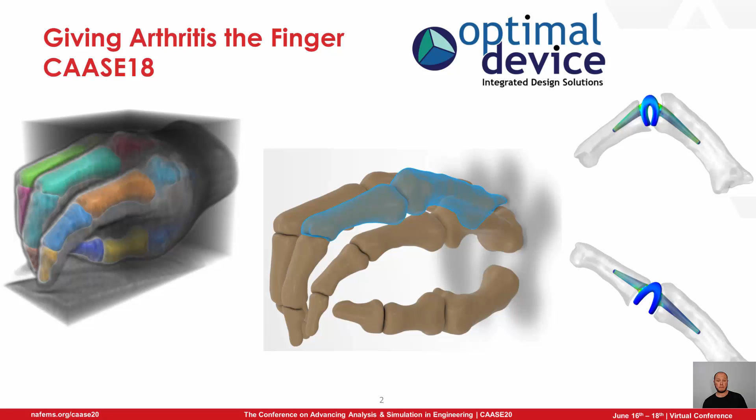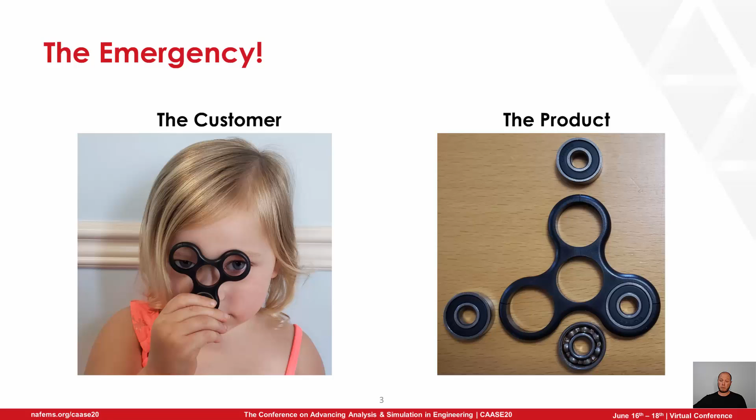But for today, we've got an emergency. The customer, Caitlin Stoppelman, who's 3.5, has a broken fidget spinner. She is not happy. It has multiple cracks, and 3 of the 4 bearings fall out easily now. The product is on the right, and we need to figure out what went wrong.

I'm dubbing this talk Excessive Engineering because I'm basically taking a trivial product and applying every single technology that I can think of at it. So we go with CAD for CATIA for reverse engineering, injection molding with SIMPOE, FEA with Abaqus, all on the 3D Experience platform. Then we go to topology optimization with Tosca, finish up with SolidWorks, and then 3D print it with FlashPrint. So let's get moving. We've got a lot of slides to go through.

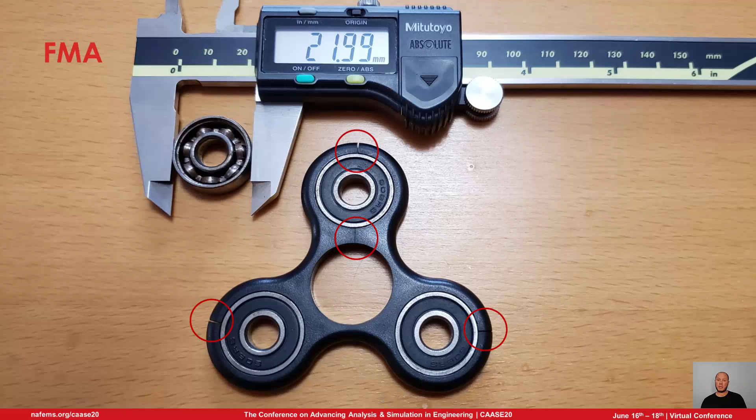So first thing we gotta do is to break out my trusty calipers and do some measurements and also identify where the part failed. I circled the 4 failures in red here, and one thing that's noteworthy is the way I have it oriented, there's a remarkable amount of symmetry to it. Right at the bottom center is where the injection molding was applied.

So we take some rudimentary measurements, do some quick CADing up, make sure there's good design intent. So at first, when I modify this dimension, the 4 that's highlighted in blue, the sketch kind of blew up. So just make sure that you're imagining how you're going to be designing it, what things you might change, and have it so there's design intent to your sketches.

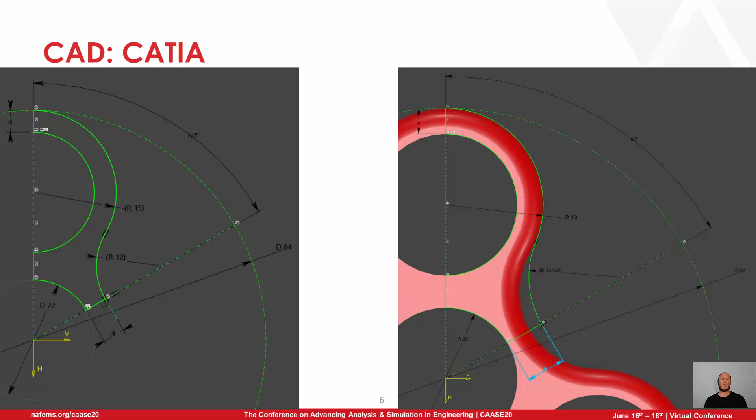So after we had that sketch, we do a pad, or what SolidWorks would call an extrude. Then we do edge fillets, do a mirror, and a circular pattern. So quick and easy, all done with geometry.

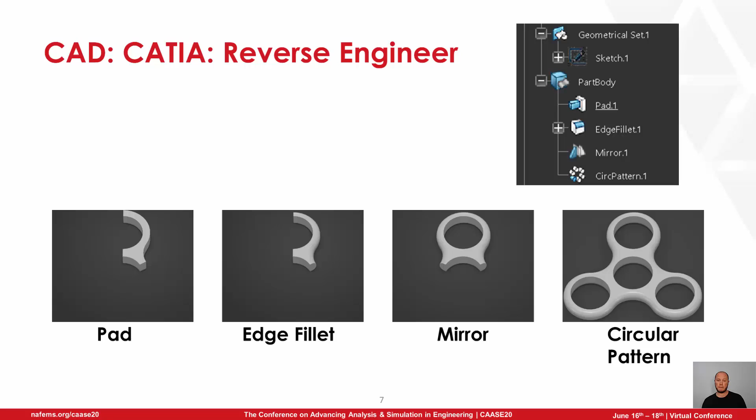Now we take this geometry and we are going to do an injection molding simulation. That bottom cone is where the injection port was. I'm estimating it's a 3mm, and I'm also meshing with a 1mm mesh size. Aside from that, it's basically defaults using ABS plastic as the material, and we're just going to do a fill simulation. So we're not going to do a pack and fill, just a fill.

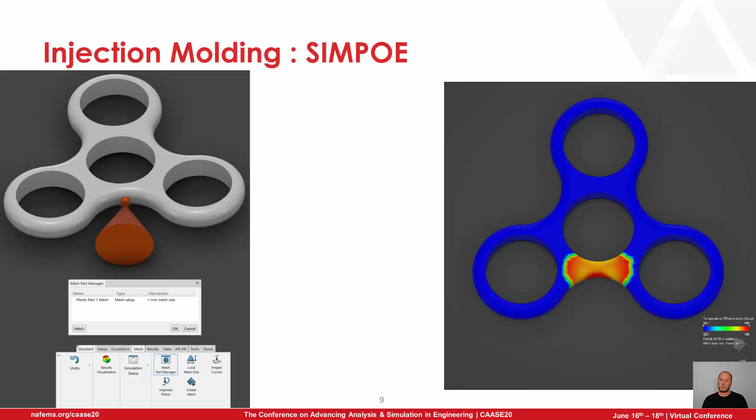So on the right, we've got the animation. The blue is where there's no material. The colors are showing the temperature of the material as it's flowing through, and it actually flows around and touches itself. Where those points occur, where one flow hits the other flow, is of primary interest here because the front of that plastic is a little bit cooler, and they're actually joined together, but it's a weak connection. So it's less strong there. It's a likely failure location.

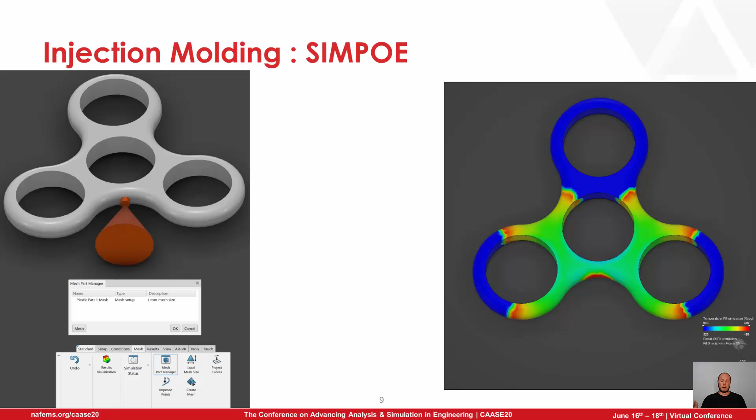So we have a root cause. We know why it's failing, where it is. I expect it's actually due to material shrinkage because this actually came out of a drawer after getting dusted off and actually had the crack. So I think the material is actually still shrinking with time, possibly due to humidity.

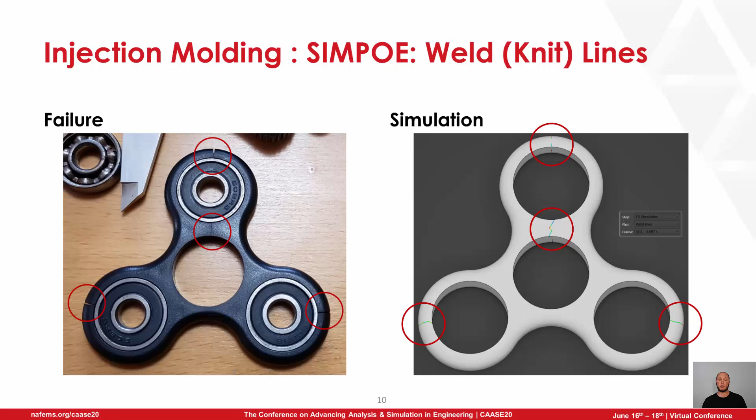So now, what can we do about it? Lots of times as engineers, we're told, I need you to fix it, but don't change anything, which is lovely when you get that. So if I can't change the geometry, I can change where the injection ports are.

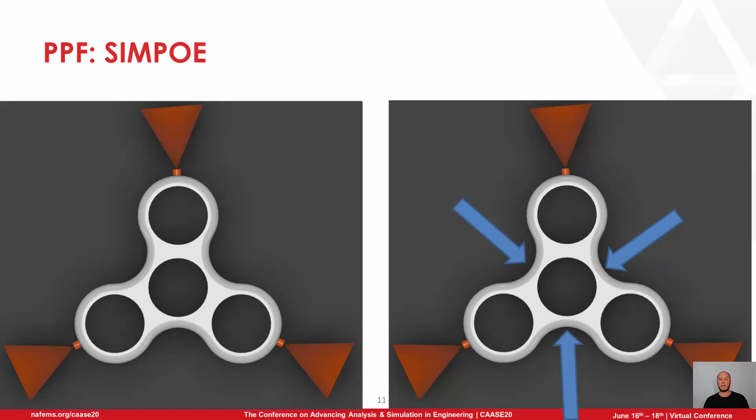So I've got 2 proposals. One on the left is the 3 cones that we're injecting at the outside edges of each lobe. An alternative that I could have gone with is the 3 blue arrows on the right-hand side. I chose the left one because I thought that it would provide a little bit more leeway in the manufacturing or in the design to make it so we can thicken it and stiffen it in these regions so we're less likely to fail because there's more material there.

So then we do the same simulation as before, but now with 3 injection sites. And you can see now it flows around very symmetrically, so we didn't have that asymmetry as we did before, which should aid in the balance and actually make the product work better.

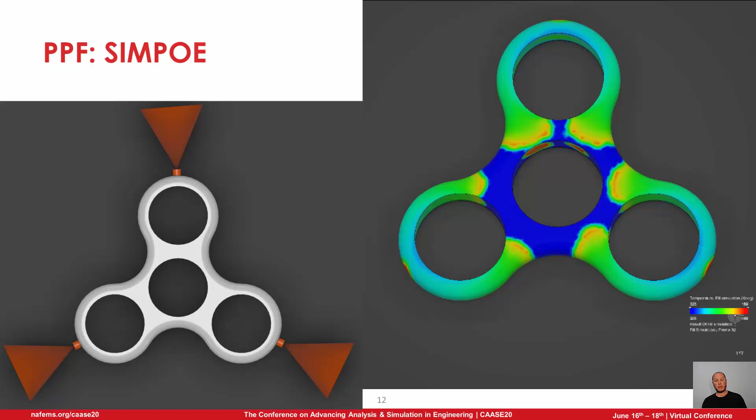But now we went from 4 failure sites to potentially 6 failure sites. So is that good or bad? I think it's okay because, like I said, we can modify the geometry there to make it so it's less likely to fail.

And here's those 6 sites circled for the knit lines.

So after this, I want to do some FEA analysis. I weighed all the bearings because I didn't want to actually model bearings, so I'm just going to have representative cylinders using stainless steel material properties, but the density is modified to make the mass appropriate.

I find that the bearing could basically be determined as rigid compared to the ABS, but with sliding contacts and a lot of non-linearities, having a little bit of give to that otherwise rigid material actually helps a lot. So I tend not to use rigid parts very often.

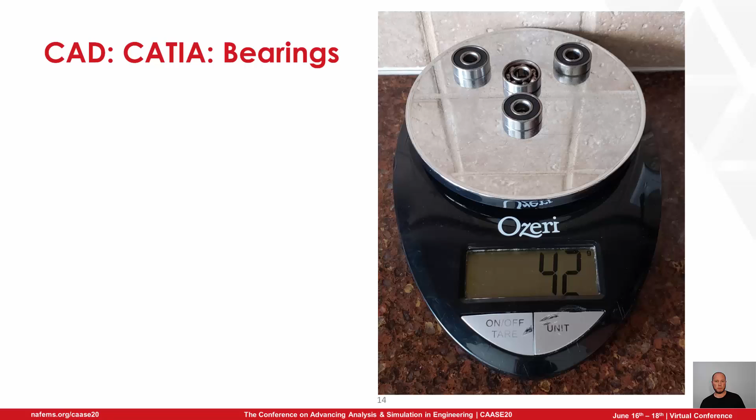The center of the center bearing I'm fixing for the second step, and then the centers of the outside bearings, for the second step, are being translated to basically extract out the center bearing. Because I don't know how much interference actually was in the design, since I got a failed part that's already splayed open and could have already been plastically deformed.

So I went and looked at some other similar products and made a best guess on how much force it takes to extract out that bearing. I'm guessing it's about 30 pounds.

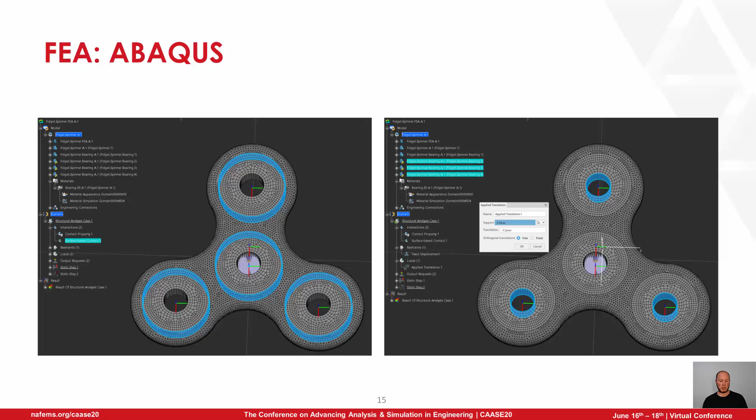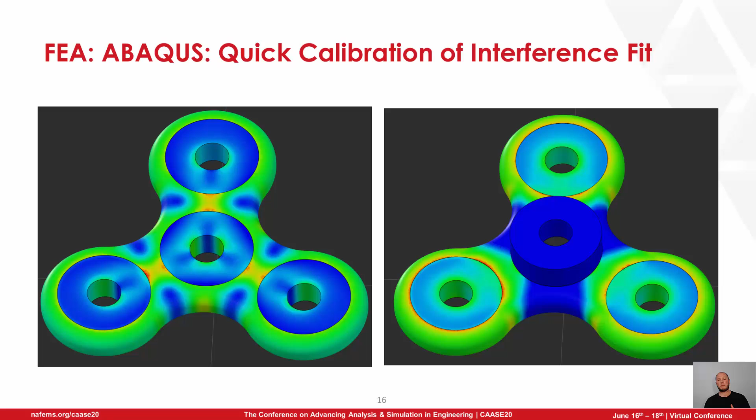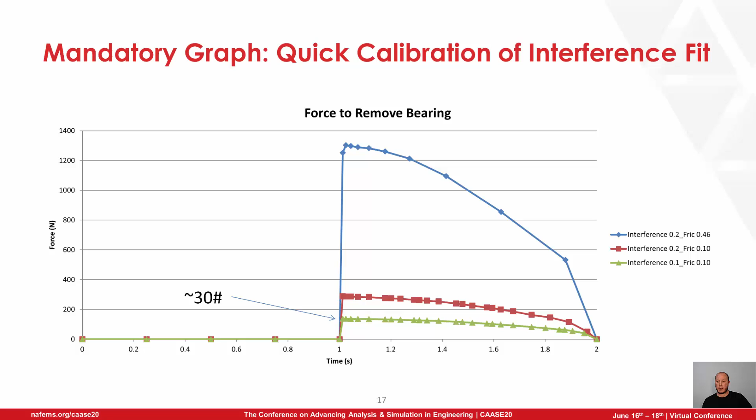So literature varied a lot on what the frictional coefficient was. The highest I found was 0.46. There seemed to be a general consensus that 0.1 might be appropriate for ABS on stainless steel, but there was a wide range, so I did 3 different cases. I ended up getting to a sweet spot after 3 attempts, so 30 pounds it is, with a friction of 0.1 and an interference of 0.1 as well.

So then I wanted to figure out what a real operating load would be. I think if you spin this thing really fast, it basically wants to break apart and fly off—so a rotational load.

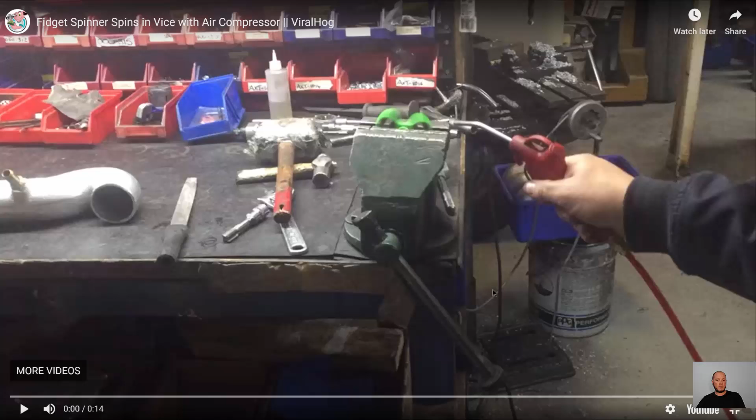So I found this video of some crazy people. Do not try this at home. They don't have safety glasses, and even if they did, they should not have done this, but it's hilarious and I love the sound.

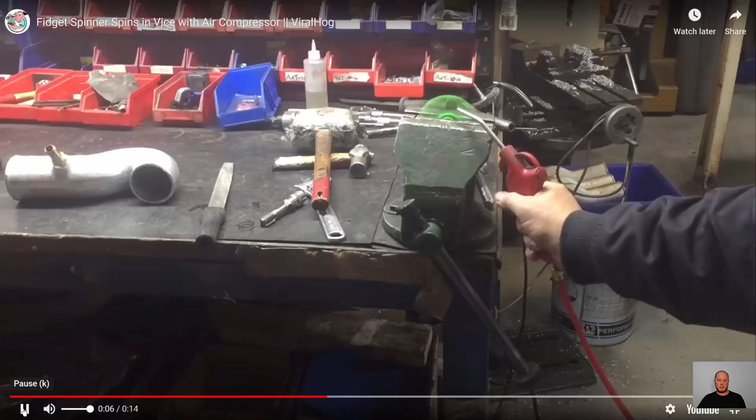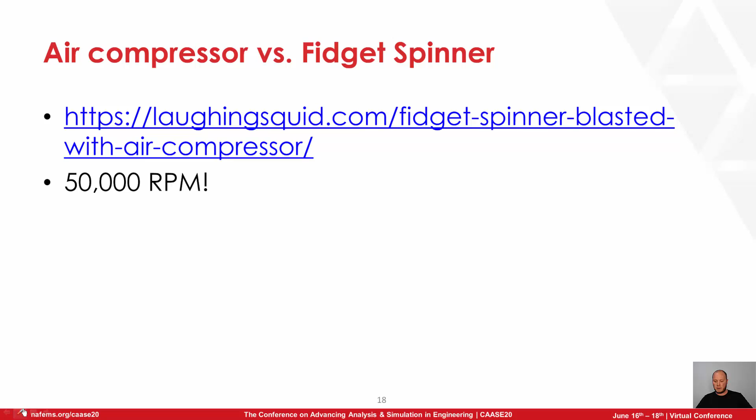As you can see, that thing just exploded. But I took the frames on either side—you can see on the left it's humming along, and on the right it looks like it's just the pads that you hold on to and the bearing. I think the entire plastic fidget spinner has actually exploded, flying off somewhere in their shop. Quite catastrophic—they estimated it was 50,000 RPM. I don't really know how they came up with that, but I'm just going to go with it.

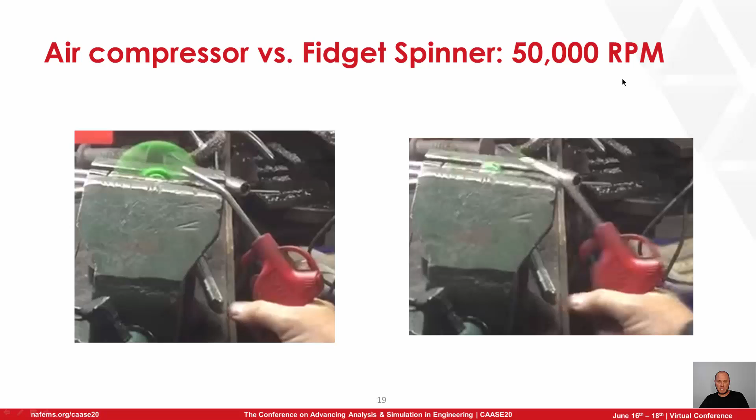So if we're going to redesign this product, we might as well make some changes and make it a little cooler. The first thing I want to do is address that it seems silly to have bearings as the ballast because they have a hole in them and they're more expensive. So I looked at 2 other alternatives, nickels and pennies, doing a stack of each. Here's the diameters, thicknesses, how many you need to get to that thickness and what the mass would be, and then the cost of that.

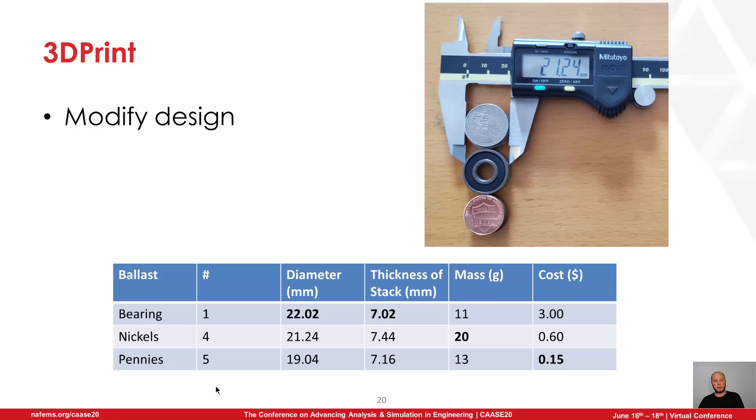So pennies are the cheapest, bearings are the most expensive, but nickels are the heaviest. I'm going to go with nickels because they still fit the same form factor, but they're going to bring a lot more rotational inertia, so they should actually work better than a traditional technique.

So up until now, everything's been on the 3D Experience platform.

All the different softwares, CATIA, Abaqus, Simpoe - the great benefit is that when I was doing modifications of the interference fit, I changed that on the CAD model. That propagates to the assembly, just like most CAD programs would do, but it also propagates to both the injection molding simulation and the FEA simulation and the meshes.

So when I go into those simulations and try to view the results, it just says they're out of date, would you like to resolve? It actually remeshes with the new geometry and resolves the analysis. If I did post-processing and had an auto-generated report, that report would auto-update. It's incredibly powerful with that. If I even changed a material property in the database, it would flag that the material property was used in this analysis, and therefore we need to resolve.

But I am going to step out of the 3D Experience platform for the next steps, because there is topology optimization on the platform, but it's more of a designer level. It didn't have the capabilities I needed, especially on the FEA side. So I'm actually going to jump out of the platform now, and I'm going to lose all that connectivity benefit, so it's going to be more of a traditional workflow.

So the design space I've got is what's the maximum footprint the fidget spinner could be. Because of ergonomics, there's only so much distance you can pinch and be able to hold. So I'm locking in the design based on the analysis they did to figure out what was ergonomic for their expected population of use - children of whatever age.

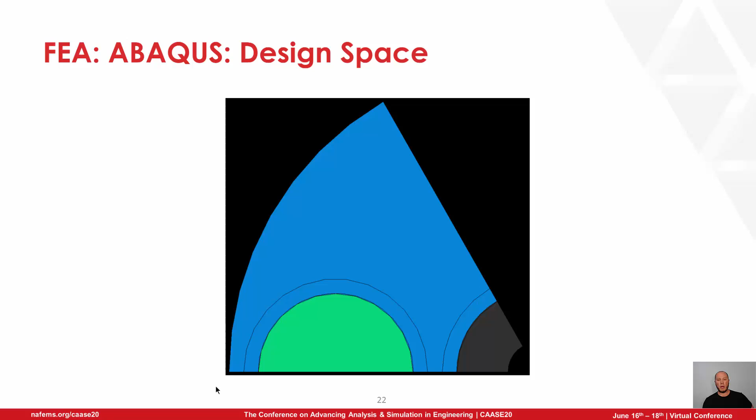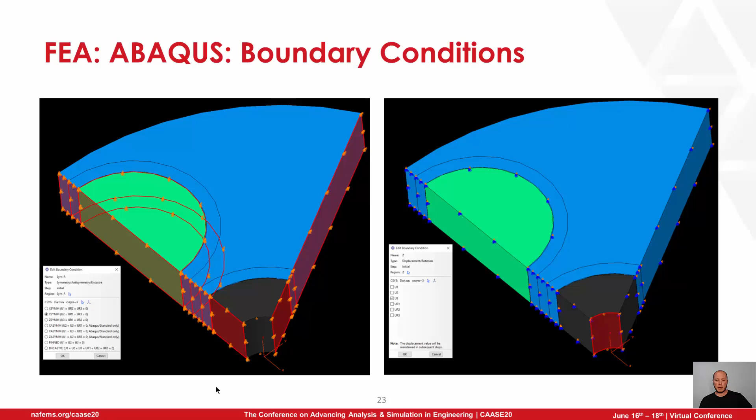We've got some symmetry planes on the left - I'm using a cylindrical coordinate system to make sure those symmetry planes are enforced. On the bottom right, we've got a fixed constraint in the Z direction, so it can't move in the axis of the bearing - no translations in that direction. I'm applying a body force based on that 50,000 RPM, converted from RPM to radians per second.

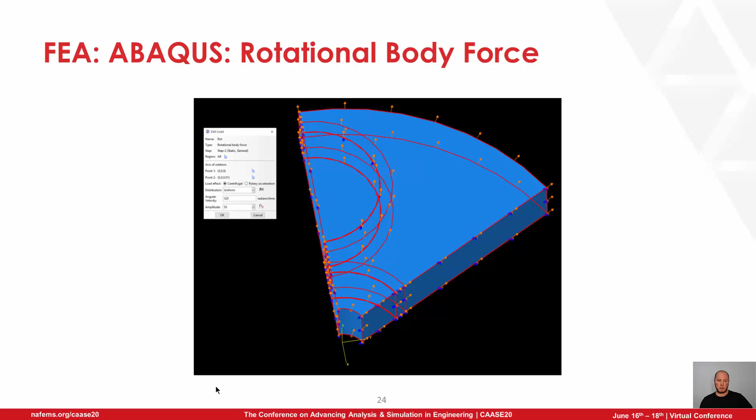So when I did the 50,000 RPM, by the time I got to 30% of the load, everything in red was already yielding. So I believe this design would not work at that speed - and this is a completely solid fidget spinner, so it should be as strong as you really could make it with ABS. So I revised the simulation since it only got to 30% before yielding, and went to 10% of what they suggested, so 5,000 RPM.

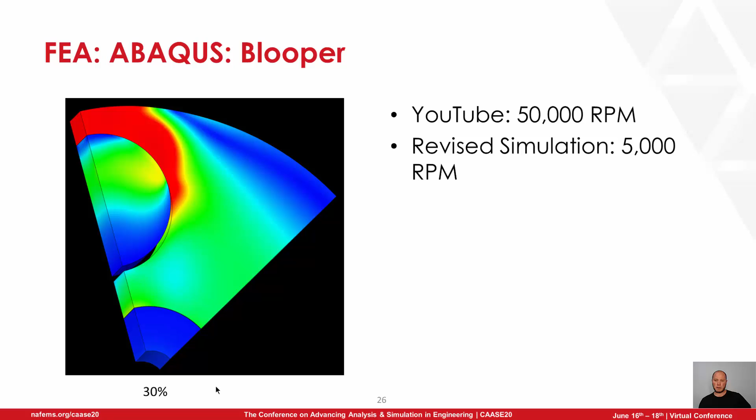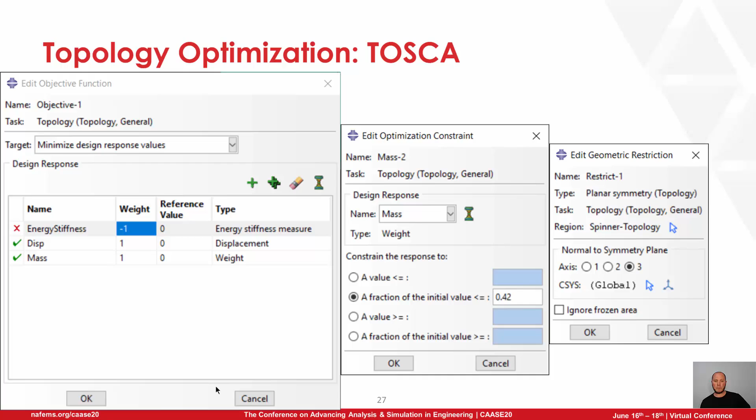And then here's some of the bloopers that I got, and I thought these ones were particularly cool, but I did not understand what the optimization was trying to do here. It didn't seem like an efficient use of space, but they were kind of cool, so I'm putting them in my blooper reel.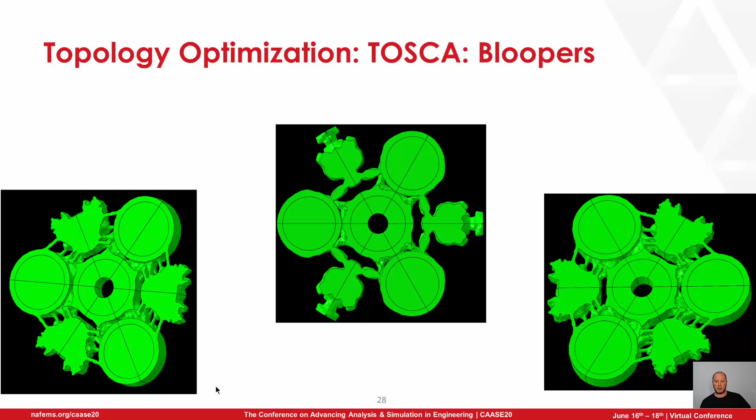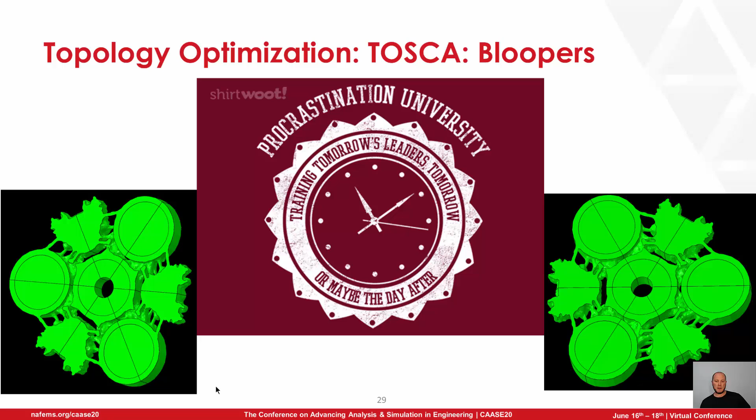But I was doing a lot of this work last minute, so I am a member of Procrastination University, and 2 of the simulations that I stayed up until probably 2 a.m. to do were identical, and I didn't realize it until the next morning. So do your work early, like I tell my children.

The reason why I was getting weird results is this energy stiffness measure. You actually want to maximize that, not minimize that. So you actually have to have a weighting of a negative value to make that work. Once I did that, I got the results on the left, which are starting to look a little bit more reasonable. You've got this web that's connecting all the bearings, and then you've got these struts that are starting to form, connecting the outside bearings.

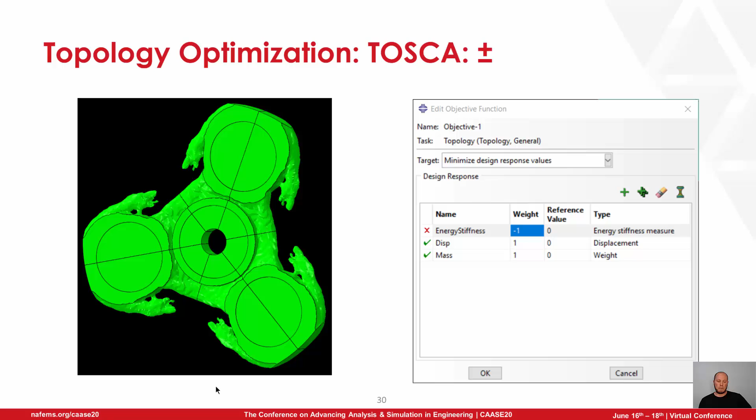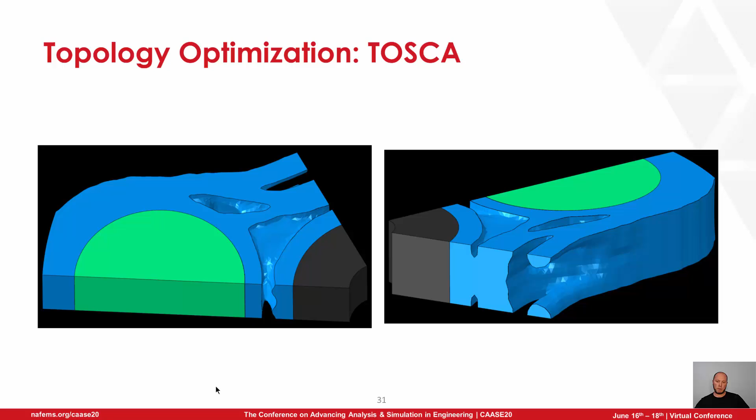But for the final simulation, I actually turned off the energy stiffness as part of the objective function, because again, I was looking for a cool looking result, and I like the one that I ended up with without that. So without that, I got this. So we've got two struts connecting. We've got nice planar surfaces, which are going to come in handy for 3D printing. And then we've got some scalloping in on the top and bottom faces. And it has a traditional fidget spinner sort of look.

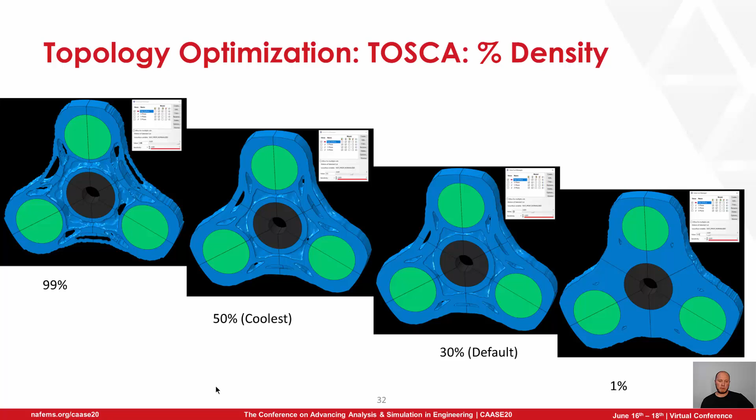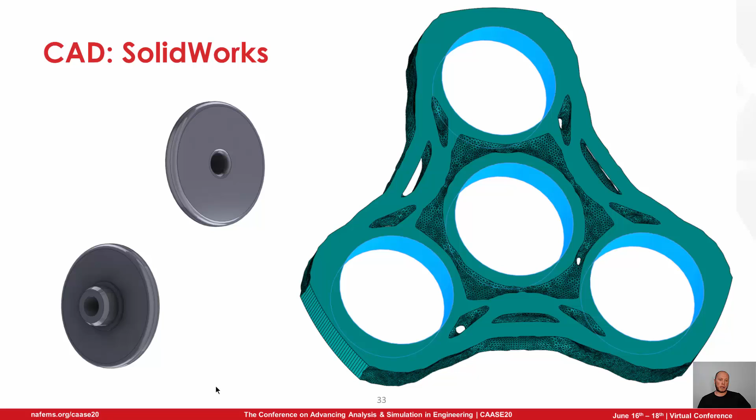And then I brought this over into SolidWorks. You can save it out as an STL or as an IGES. And there are smoothing algorithms, and you can see any face that should have been planar or should have been cylindrical is. The other faces are more like an STL, but just in IGES format. I create a couple finger pad buttons. And now we're actually over to my 3D printer software. I use a FlashForge Creator Pro.

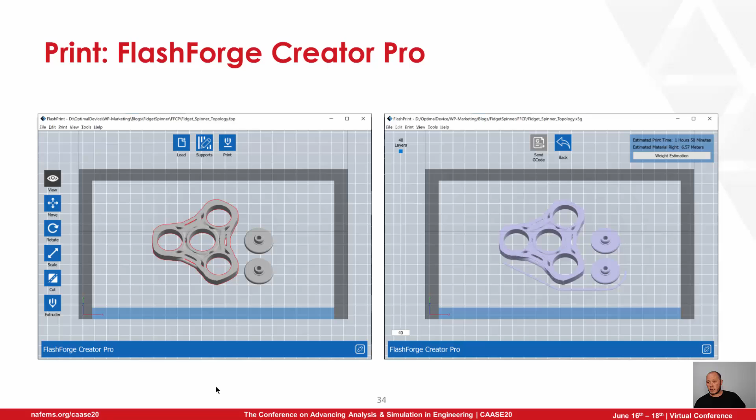And you bring it into the software, make sure that the flat surfaces are touching the print bed so they adhere well. That's why this design was particularly good. And then we slice it. It's going to take 40 layers. We're going to print over an hour and 50 minutes. And the amount of actual filament used is going to be 6.57 meters.